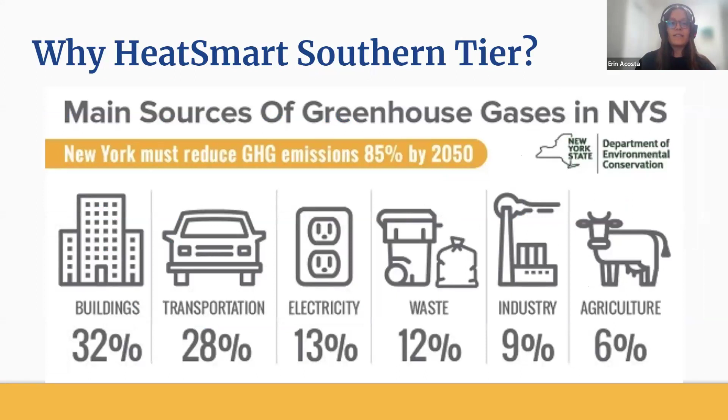Some main benefits of participating in HeatSmart Southern Tier is that it could reduce your individual energy costs while improving your home comfort and safety. More broadly, there are also some community benefits. You could reduce your greenhouse gas emissions and improve community awareness of clean energy. And you could also gain grant funds for your community through clean energy communities.

We work with a lot of different municipalities in the Southern Tier to become clean energy communities. This is another NYSERDA program that encourages municipalities to be more sustainable in exchange for rewards. If you make a green improvement, such as improving energy efficiency or installing a heat pump, that translates into points. Those community points can lead to increased funding for your community. One thing that we can do is help you find out if there's a CEC program in your municipality.

HeatSmart Southern Tier covers weatherization and heat pumps. The goal of weatherization, which includes insulation and air sealing, is to protect your home from the elements and improve its energy efficiency. Heat pumps are technologies that can provide clean and efficient energy inside your home. The program focuses on ground source heat pumps, air source heat pumps, and heat pump water heaters. We're going to have some more details about how this technology works a little bit later on.

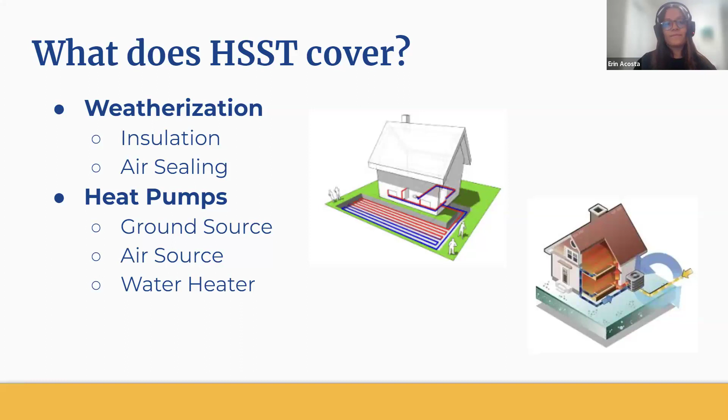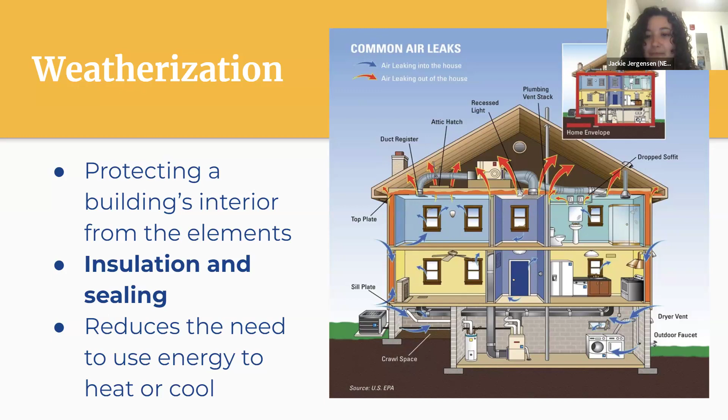So just some benefits to weatherization: it's going to reduce your energy consumption and also reduce your costs - electric costs from running the AC constantly, or your fuel oil costs. It can also increase your home safety and comfort by reducing drafts, improving humidity control, improving indoor air quality, and reducing the risk of ice dams in the winter.

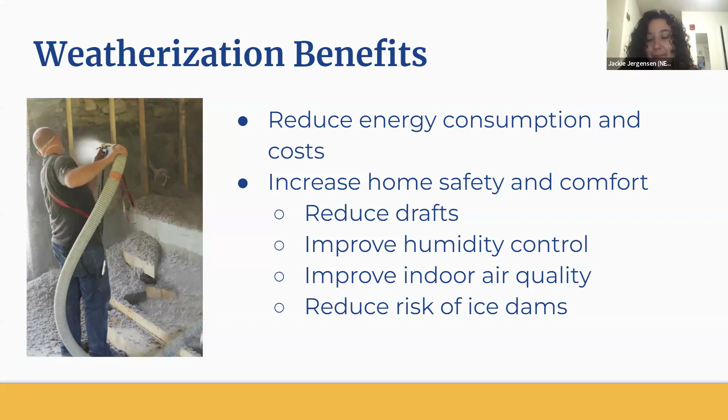Okay, so we're moving on to heat pump technology now. And if you all have refrigerators in your home, you already have this type of technology, which is pretty cool.

Heat pumps basically use electricity to both heat and cool - it's like your AC and your heating system all in one. Basically, how it works is there's always going to be some heat in the air in the wintertime, or heat in the ground, and this system pulls the heat, compresses it, and then pushes it into your home when you need it.

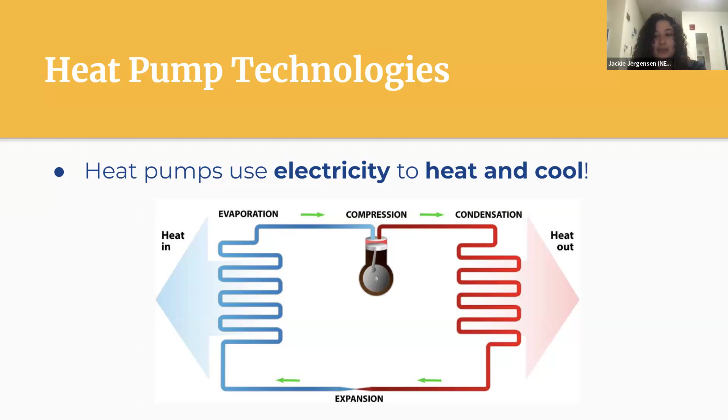And then in the summertime, it'll work in reverse. It'll pull out all the heat from your home, compress it, and move it outside to keep your home cool.

There are three main types of heat pumps we'll cover tonight: air source heat pumps, ground source heat pumps, and heat pump water heaters, like Erin mentioned before. The air source heat pump is great for space heating and cooling, while the heat pump water heater is used for hot water heating. But the ground source systems can actually do both, so we'll get into that first.

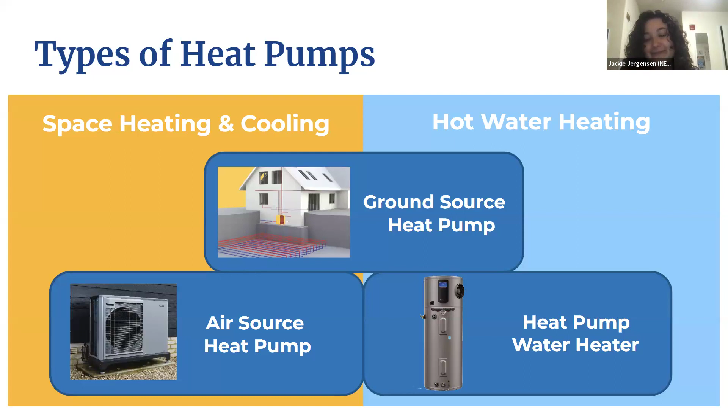There's a pretty stable temperature, about 6 feet underground, year round - that's why they dig to that depth or deeper. In the wintertime it'll pull that heat from the ground and pump it into your home, and in the summertime, it'll take the heat from inside your home and pump it out, like we talked about.

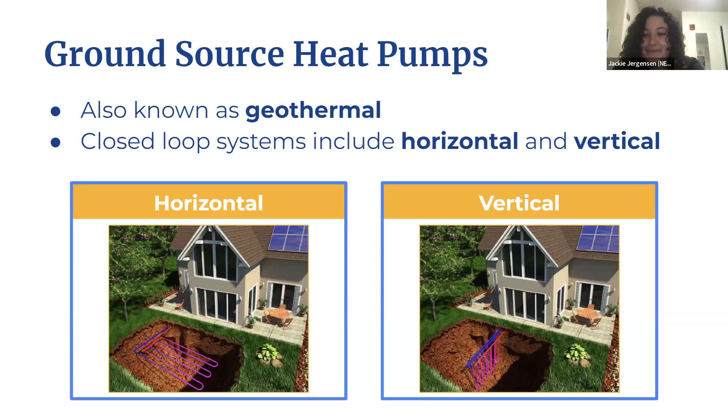So the benefits of having a ground source heat pump or geothermal system is that it's a really efficient heating and cooling system in one, and it can also include heating domestic water. It also has a long system lifetime, and you could completely eliminate fossil fuels from your home - no more worrying about oil or gas deliveries in the middle of winter or running out of fuel.

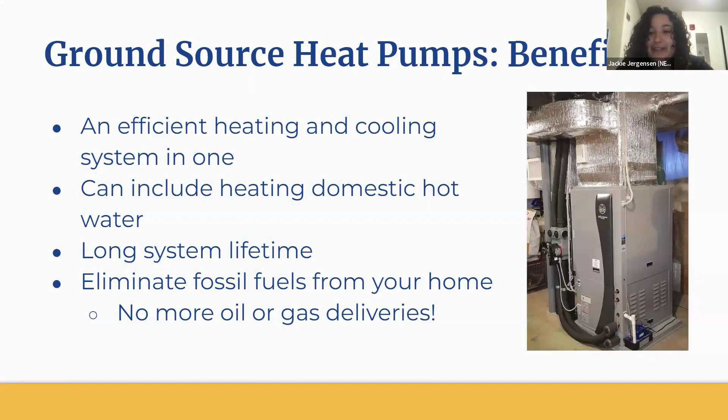And there's a bunch of different types.

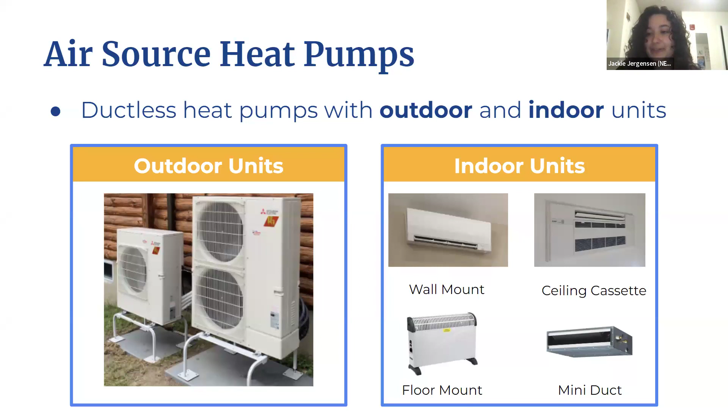The benefits of air source heat pumps are that you don't need to do a full heating replacement. The air pumps can be used to supplement the heating system or AC you already have. There's great zone control, meaning you can have different temperatures in different rooms. It's air conditioning without the ductwork, and they also run very quietly.

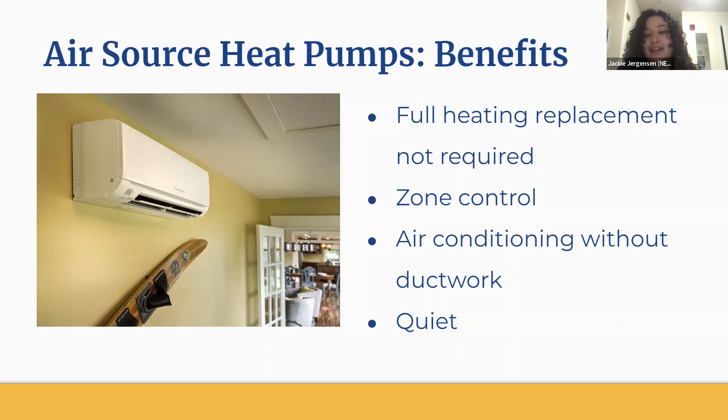And that brings us to our heat pump water heater. This is a system that uses indoor air to heat hot water, and there is a backup for meeting high demand, so there's no worry about running out of hot water. It's got greater efficiency than typical electric water heaters, and it also serves as a dehumidifier, which is great for basements.

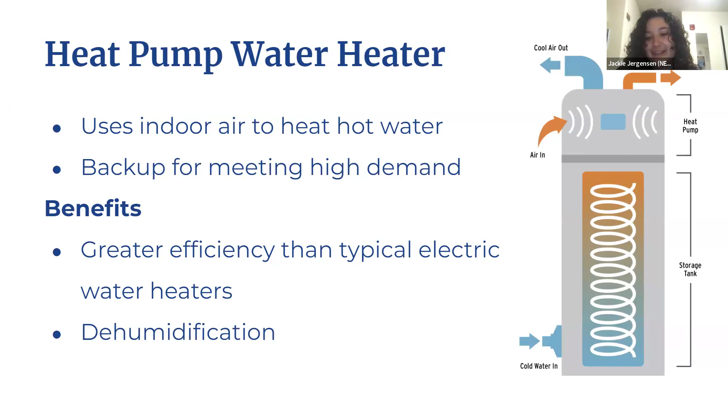Hi guys. So of course, everyone is interested in these energy efficiency technologies and having lower heating and cooling costs, but the big question is finances. Finances are a large factor in people's interest or ability to pursue these improvements. So we're going to give an overview of the rebates, the tax incentives, and the different ways to finance the technologies we've covered, because the upfront costs can be inaccessible for everyone.

One benefit of going through the HeatSmart program is the ability to talk with an installer partner. We have some of them on the call today, and they can work with you and your unique financial situation, helping you take advantage of the full state and federal incentives that exist.

The first set of incentives we'll look at is the NYSEG and New York State rebates. These are rebates you can put towards the projects to reduce the upfront cost, as long as the improvement qualifies with the criteria. All of Nest's competitively selected partners will have the correct certifications to make sure your project has the right heating capacity, so you don't have to worry about the specifications.

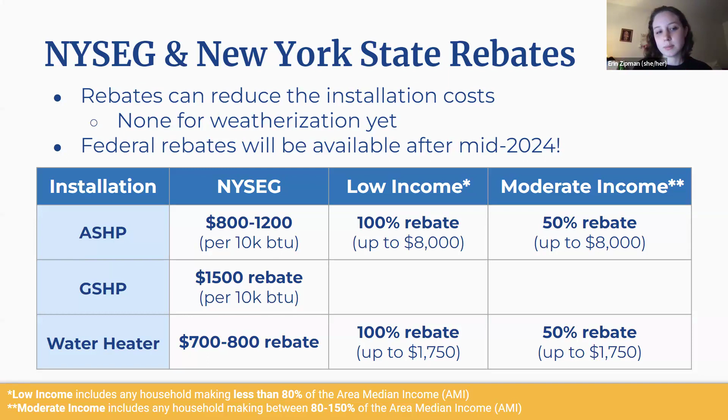Next, we have the tax credits you can get after making these improvements. The IRA, or Inflation Reduction Act, offers a 30% tax credit for each project. This means that 30% of the project costs for installation of insulation, an air source heat pump, a ground source heat pump, or a heat pump water heater can be reimbursed to you as a tax credit, counting towards your federal taxes.

There are also New York State tax credits you can get on top of your federal taxes. New York State currently has a 25% tax credit up to $5,000 for a ground source heat pump. And again, you can combine those.

There are also different financing options outside of rebates and tax credits. Of course, you can seek out a loan. NYSERDA offers two different loan options: the Smart Energy Loan and the On-Bill Recovery Loan. They're essentially the same, with similar terms. The only difference is that the On-Bill Recovery Loan is paid on your utility bill over time, so it's a different term and manner of paying.

There's also financing you can find through specific heat pump manufacturers like Synchrony or Enerbank. Those are unsecured loans; they can have dealer fees, but can have longer terms of up to 20 years. And lastly, you can go the traditional route and secure a loan through your local bank if those interest rates are more competitive than the other options.